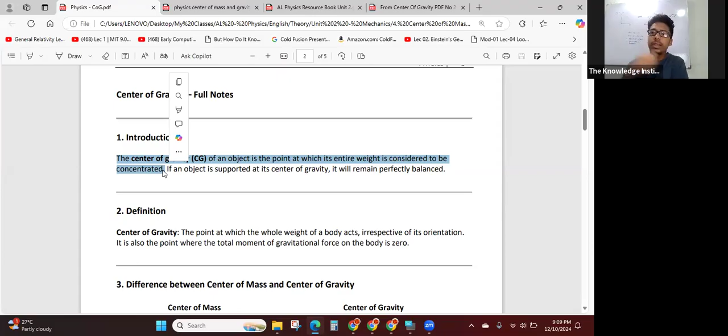Okay. So the conceptual idea of center of mass is, it is the point where we can consider the whole mass is concentrated. So the center of gravity means it is the point where we can consider the whole weight is concentrated. So the center of gravity of an object is the point at which the entire weight, so you have to highlight the term weight, is considered to be concentrated.

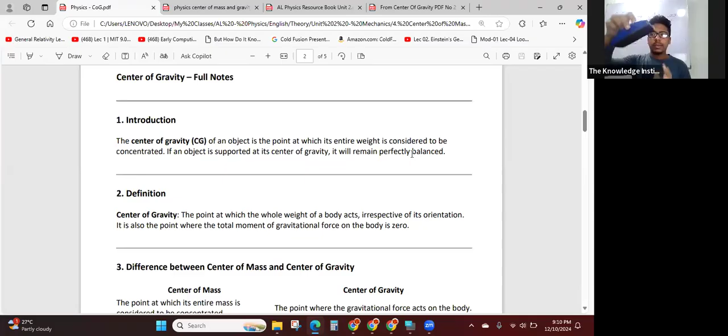If an object is supported at its center of gravity, it will remain perfectly balanced. Now, for example, I'll take this. This one has a center of gravity. If I try to balance from this point, I can't balance, but I can balance it from the middle because the center of gravity will be at the middle. So, if an object is supported at its center of gravity, it will remain perfectly balanced.

So the center of gravity of an object is the point where we can think the whole weight is concentrated. But that is not the actual definition. The definition we can give for the center of gravity is the point at which the weight of the object is acting. The point at which the whole weight of a body acts, irrespective of its orientation. It is also the point where the total moment of gravitational force on the body is zero.

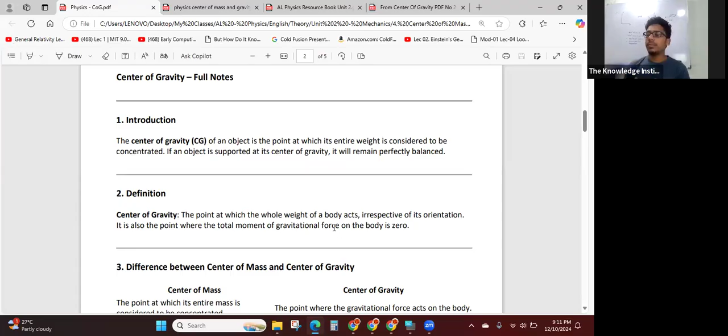Now, if I consider from the center of gravity, the moment in the clockwise direction and the moment in the anti-clockwise direction, they cancel off. So the moment about the center of gravity will be zero. So the definition for center of gravity is the point at which the whole weight of a body acts. I can explain this to you with a picture.

So if you take an object, the material is made of an enormous number of small particles. Each particle experiences a gravitational attraction force, and they all act vertically downward because the gravitational attraction acts towards the center of the Earth. So you can see these are now a bunch of parallel forces. Each weight is a force, so we can find the resultant of these forces.

Now remember, in the moment of force, we studied how to find the line of action of two parallel forces. So likewise, now you can find the line of action of the resultant of all of these forces. It will be acting from a particular point. That will be the center of gravity.

So let's write down. First you have to write the center of gravity of an object is the point at which its entire weight is considered to be concentrated, and the definition is the point at which the whole weight of a body acts, the point at which the weight is acting. Then, after writing the definition, draw a picture like this.

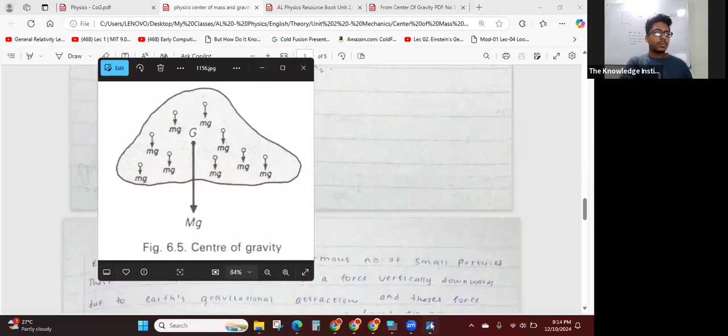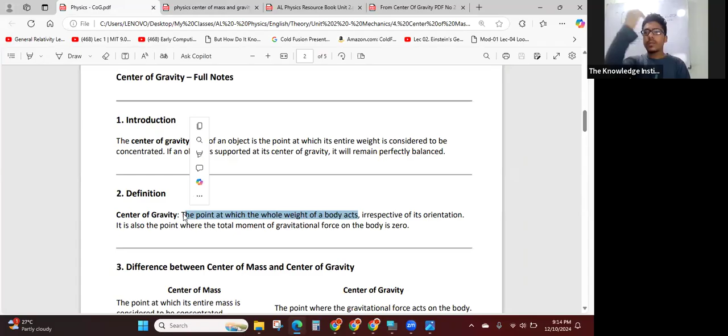The point at which the whole weight of a body acts. Okay, so then we can write: every object is made of an enormous number of small particles. These small particles experience gravitational attraction force vertically downwards. And all of these forces are parallel to each other.

If we calculated the resultant of these forces, it will act from a certain point. This point is known as the center of gravity.

Okay, I'll read again. Or else I better read and write. Okay, so every object is made of an enormous number of small particles. I can't write this. Okay, I'll read again. Quickly note down.

Every object is made of an enormous number of small particles. These particles experience gravitational attraction force vertically downward. And all of these forces are parallel to each other. If we calculate the resultant of these forces, it will act from a certain point. This point is known as the center of gravity.

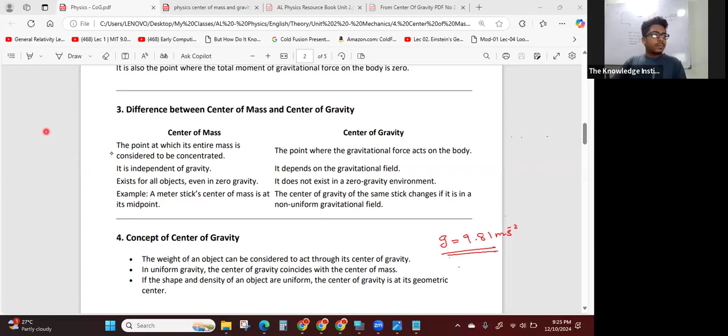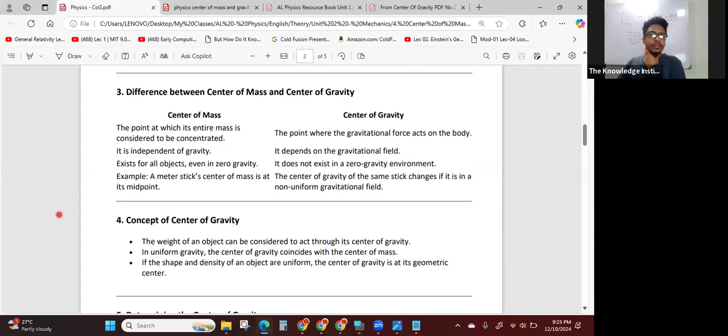So those are the major differences of center of mass and center of gravity. Okay, so the concepts of center of gravity: so far what we discussed is summarized here. The weight of an object can be considered to act through its center of gravity. The weight of the object acts from the center of gravity.

In uniform gravity, the center of gravity coincides with, now you have to highlight this, the center of mass. I think it's better you write uniform gravitational field. Gravity or gravitational field both have the same meaning, but still better to go with the term gravitational field. In uniform gravitational field, the center of gravity coincides with center of mass.

So that line you highlight and write. In uniform gravitational field, the center of gravity coincides with center of mass. Now, if I take an object like this, this object has a center of mass. I'll draw here on the screen. So here I have an object, total mass, let's say capital M. I can consider its center of mass here, meaning the total mass is concentrated at this point. And let's say this is the ground.

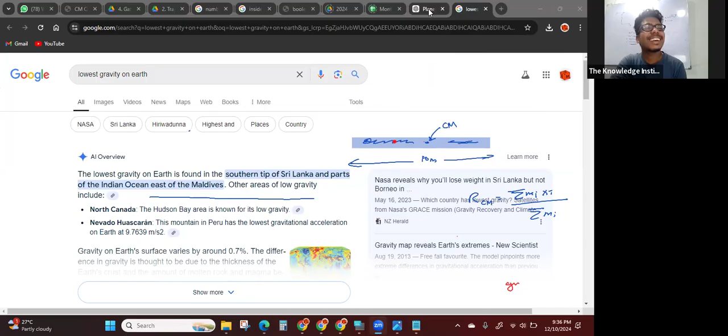So I hope one of my students, maybe you all, can become pioneers in space and start a space exploring company in Sri Lanka, inshallah. Is there anyone who has such goals? Okay. Thank you, Hiroshi and Abhishani, for sharing this information. Wow, that's so great. So if you start a spaceship company like that, what can I say? You should take me to space, okay? Free of charge. All right. I also have a dream of going to space. I'm serious. Anyone can think I'm crazy, but it doesn't matter. I also have a dream to go to space, hopefully one day.

All right. So, determining the center of gravity. Here we have to emphasize these concepts. First, the center of mass coincides with the geometric center of a regular shaped object if the mass distribution is uniform, the density is uniform. Secondly, about the center of gravity: if the gravitational field is uniform, the center of gravity coincides with the center of mass, and if the mass distribution is also uniform, then the center of gravity coincides with the geometric center of the regular shaped object.

So the center of gravity of regular shaped objects, something like a square sheet or circular disc, is at the geometric center. This is true only if, okay, the center of gravity of an object will be at its geometric center if and only if two things are satisfied. The first one is the mass distribution is uniform.

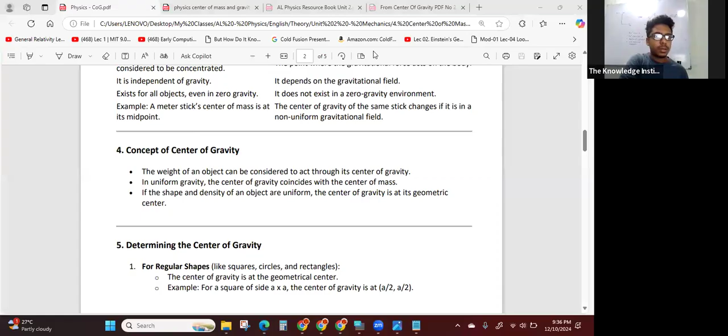Okay, I have got some messages. Okay, you can note down. You can't see any changes on the screen. Okay, yeah. Hold on, I'll check. I'll stop sharing. Share. Your screen sharing is paused. Okay. I hope you can see it now.

Okay, so you can write down the first: uniform rod. So if the length is L, its center of gravity will be at the midpoint. Okay, and uniform ring. So here the center of mass of a ring is also at the center. Now, if you take an object, there is no restriction that the center of mass should be within the object. Now, if you take this ring, its center of mass is not within the object, right? So it is in the space, the middle. Okay.

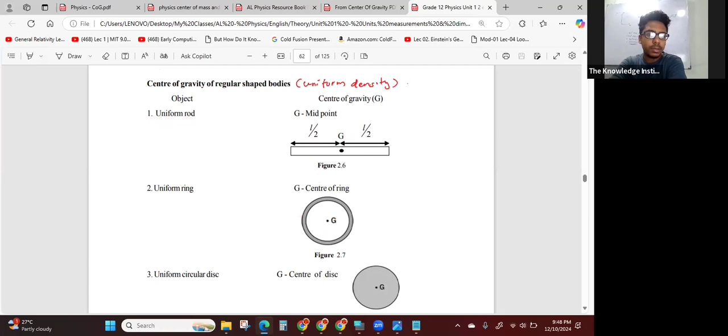You can write down uniform rod and draw this and these things. The center of mass in the ring is here, the same point. If the mass distribution is uniform, then it will coincide with the geometric center. If you take a circular shape, the geometric center is its center. So the center of mass is here. Therefore, the center of gravity also will be here.

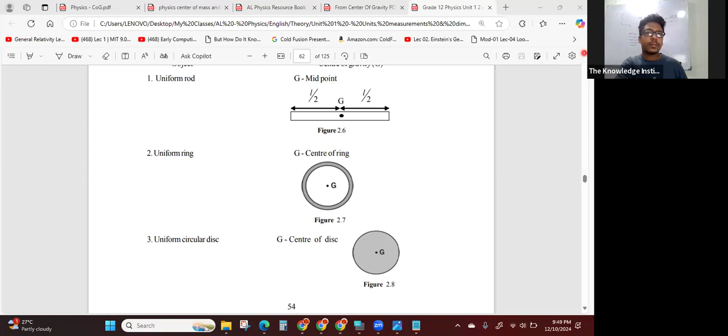And third, you have a uniform circular disc. If you couldn't draw, don't worry. I will share these screenshots also. Okay. Or else you can take a screenshot. Okay. You can take a screenshot and then you can complete your drawings later.

Uniform rectangular shaped lamina. Lamina means thin sheet. For thin sheets, we say lamina. So the center of gravity will be the intersection of the two diagonals.

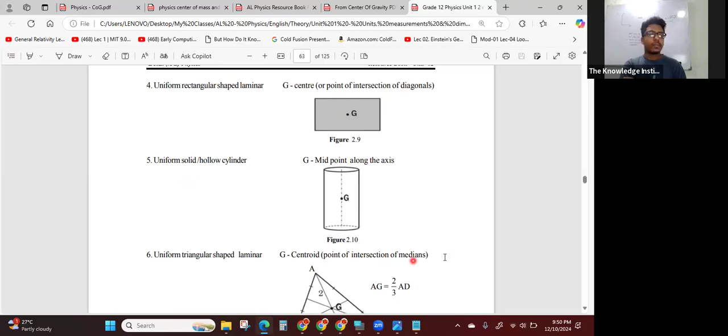And if you take a triangular lamina, how do you get the center of gravity? So say you have a triangular lamina. You have to draw a line from the vertex to the midpoint of the opposite side. And from this vertex to the midpoint of the opposite side. And from this vertex, then if I draw these two correctly, then definitely this will go through the center intersection.

Okay. And here you should know that if this is the center of gravity, the center of mass also will be the same point. Here, this length ratio is 1 to 2. So this length to this length is 1 to 2. That means if this length is 2 centimeters, this will be 4 centimeters. If this is 5 centimeters, this will be 10 centimeters. The ratio is 1 to 2. Okay, so that is here.

It will be the same for any type of triangle, like you can take isosceles or equilateral triangle or right angle triangle. So for any triangle, this is the method you find the center of gravity. Okay. And the center of gravity of uniform hollow cone.

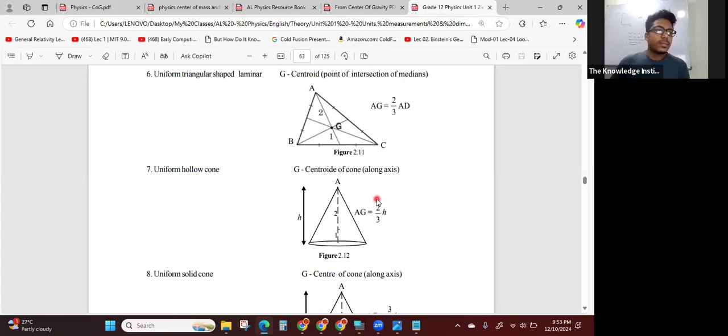Now in physics, we only take the results, but those who are doing combined maths, you have a separate unit called center of gravity, which I like the most in applied. In the applied paper, the first question I'll take is center of gravity because it's very easy. You just have to integrate the density or the mass over the volume. So, uniform hollow cone, uniform solid cone. In combined maths, you have to find all of this using integration.

Guys, give me a second.

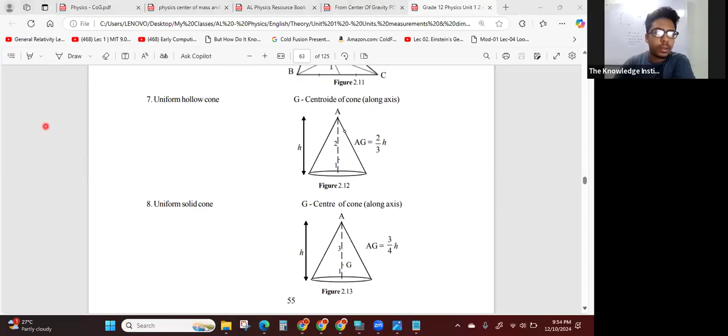Okay, uniform hollow sphere or solid sphere, the center of gravity will be at the center point, midpoint. So that's all. And there are only few things I need to discuss about the theory, and then we can do calculations.

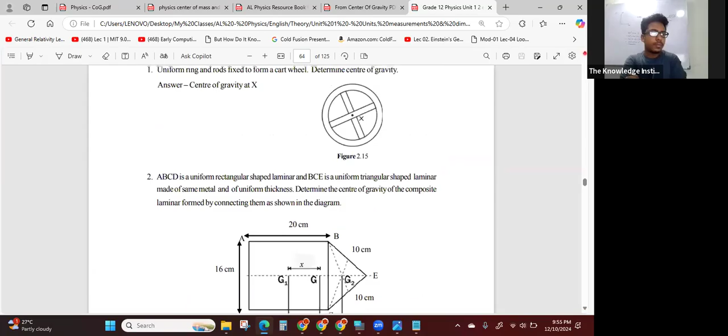Okay, to find the center of gravity of irregular shapes, something like this. For example, if I have an object with no regular shape, for this we can find the center of gravity with the suspension method. That means you hang this from a particular point. If I take an object and hang it from a particular point, then if I drop this, it will oscillate and come to a stable position so that the tension and the gravity, the weight, will be aligned, right?

Finding anything to show. Mm.

Okay, now for example, here I have this, but this is definitely a regular shape. So anyway, let's say if I hang this from here, it remains stable because the center of gravity is also aligned along this line, because you can see the midpoint, if you draw the diagonals, you go from the middle. So from this point the weight is acting, and then the tension, actually it's a friction here on my hand, so that friction and the weight are aligned, so there is no movement.

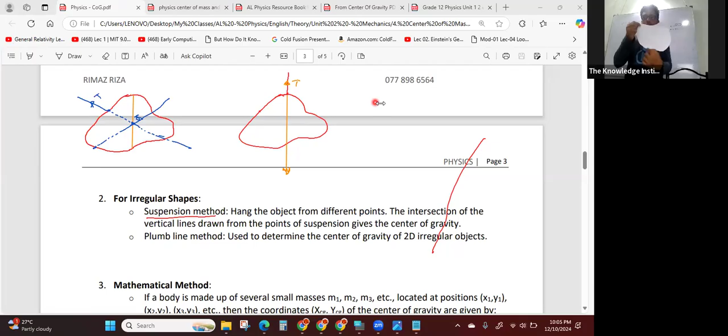Okay. So if I hang it from here, what happens? Here the tension and then here gravity, weight. So if you consider this point, there is a non-zero moment of force. So therefore what happens? It will swing due to the moment of force. Actually here I have friction in my hand. That's why it's stopping.

Otherwise, what happens? It will oscillate and finally come to the equilibrium position. So when it's balanced like this, then you can draw a vertical line. Okay. So I draw a vertical line. So here's a vertical line. And then what I can do is again hang it from another point. So then what happens now? I'm holding from here and release my hand.

So if I hang it from here, now what happens? Here the tension will be there. Tension, and then the weight somewhere from this. It could be here, here, or here, depending on the mass distribution. Somewhere on this line, the weight acts vertically downward, W. Okay. So I know now the center of gravity will be somewhere on this line.

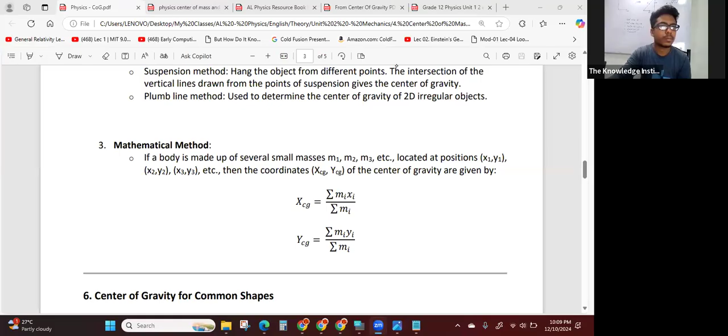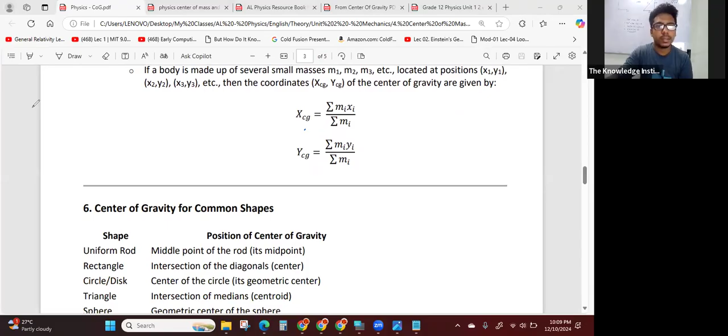So, to find the center of gravity, the plumb line method, it's the same thing actually. Plumb line method means using that string and small weight, the plumb line. We call that the plumb line, no? So it's a string and then a small weight will be there. People in construction use it to see whether it's vertical. It's simply a string and a weight.

Okay. So instead of drawing the lines, you can use the string, and then using the string, you can mark the line correctly. Both are more like the same thing: suspension method and plumb line method. Here also you have to do the same thing, like what I have explained, but now instead of drawing the line, you first use the plumb line. So with the aid of the plumb line, we can draw the line. Okay.

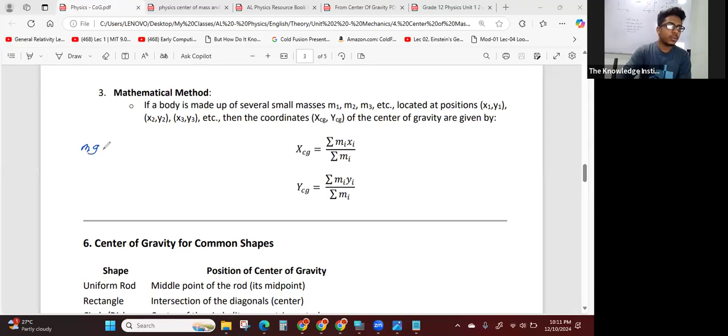All right. So the center of gravity actually comes from the definition of moment of force. Now, how we calculate this is actually the center of mass. So the center of gravity, how do we write? The m1g, the weight, times the distance x1, plus m2g.

Okay, the moment of force is m1g times, let's say, distance x1 plus m2g times x2 plus m3g times x3 plus dot dot dot. Let's say there are n number of particles, mng times xn. Okay, so that one should be divided by, or else I'll explain. This is the total moment.

Now let's say this is the mass of an object. It's made of small masses m1, m2, m3, m4, m5, m6, a number of masses. Then you take the moment from an axis. That axis is your choice. You can choose the axis here, or somewhere far, or here, or on the center of gravity. We don't know it, but assuming we are taking from the center of gravity, you can also do it.

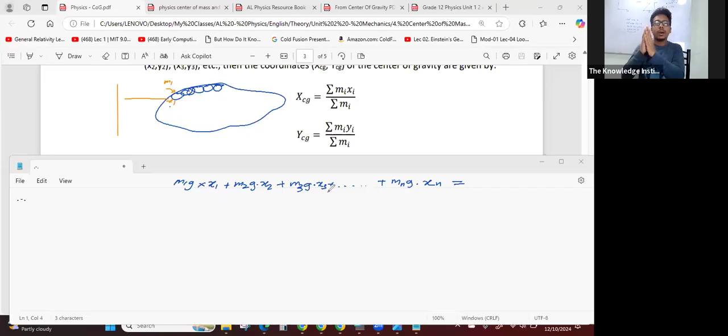Okay, so now let's say I'm taking the axis here. Then this is the mass m1 at distance x1, m2 at distance x2, m3 at distance x3. In moment of force, we studied the net moment about a point due to every force: F1 times d, F2 times d, F3 times d equals the moment made by the resultant of these forces from that same point. The resultant weight of all of this acts from the center of gravity, by the definition of center of gravity, the point where all the weight is acting.

So here capital Mg, where capital M is equal to sigma, or before writing the sigma notation, I write M1 plus M2 plus

Okay, so here M equals M1 plus M2 plus M3 plus dot dot to Mn. So the total weight is from the center of gravity. So here I can write M1 plus M2 plus M3 plus dot plus Mn times g. In the left hand side, g is common in all the terms, so you can take g out. Then M1x1 plus M2x2 plus M3x3 plus dot Mnxn equals the total mass. This equals sigma mi, adding all the masses m1 to mn, i equals 1 to n.

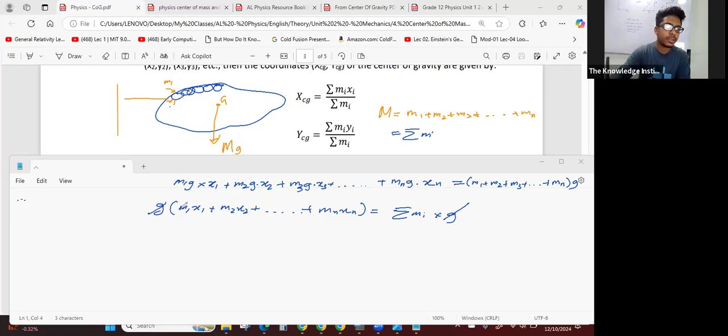Okay, so sigma mi times g. So g on the right hand side and left hand side cancel. So here we get sigma mi into the distance x bar. So weight, the force, into the distance. Let's say this distance is x bar. So therefore, g and g cancel, and we get the equation.

On the left hand side, we have sigma mi xi equals sigma mi times x bar. So therefore, x bar equals sigma mi xi divided by sigma mi. Sigma mi is the total mass. If the total mass of the object is given, you can use that in the denominator. So we write the definition form sigma mi. Okay. Let me know whether you understood this.

So therefore, for the center of gravity we can take x bar, and from x bar you will only find somewhere on this line. If you want to locate it exactly, you have to take the moment from another axis also. From this axis, you take the moment, then you can find the location of y. So by taking the x and y coordinates, you can find the exact location of G. Okay.

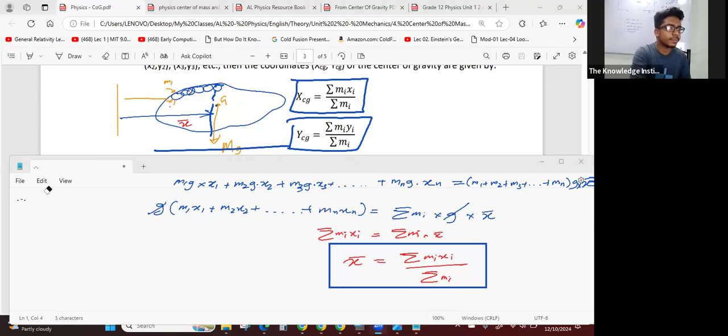But we have only two-dimensional. Okay, one dimension and two dimension, maximum two dimensions. You don't have three dimensions in your syllabus. Okay. If there's anything you didn't understand, please let me know. Okay. So I hope everyone is clear with this. So after that, we can do some questions.

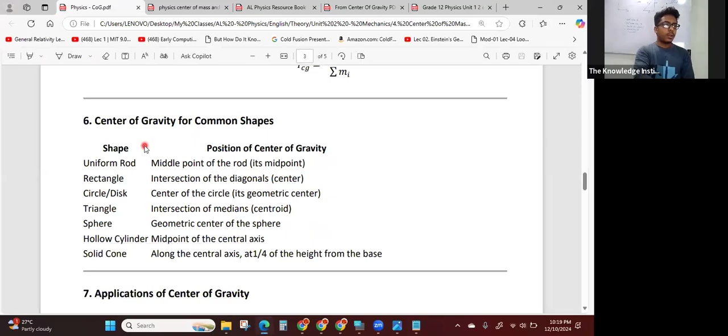Okay, we studied this earlier, those pictures. Applications of center of gravity, engineering and design. Stability of vehicles, bridges and tall buildings depends on their center of gravity. To make it more stable, we try to make the center of gravity as low as possible. Okay.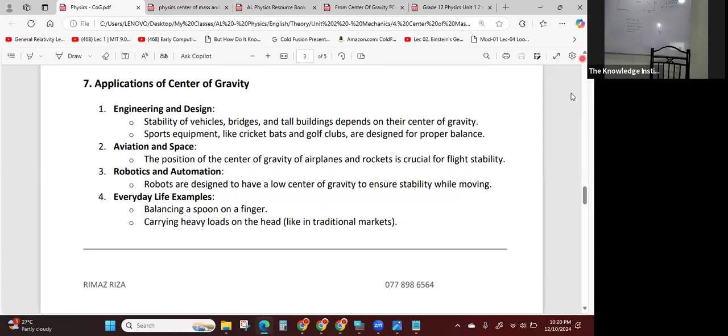There is, during the Second World War, Hitler, excuse me. Okay, so there is a story regarding Hitler during the Second World War. If I'm correct, during the Second World War, they wanted to create a car which can climb a large inclination. So Hitler brought all the engineers in the country, I think around 100 or 500, I'm not sure the count, into this project, and then they were able to create a car which can climb an angle more than 70, something like that.

Okay, so after the success of that project, Hitler killed all the engineers who were involved in that, because he didn't want that knowledge shared with other enemy countries. I'm not sure about this story, but I heard it from one of my combined maths teachers when I was studying.

Okay, so sports equipment like cricket bats. Yeah. The Taj Mahal also, you can see there is a beam kind of thing at the bottom, so it's more dense. I mean, heavy at the bottom, so it's more stable.

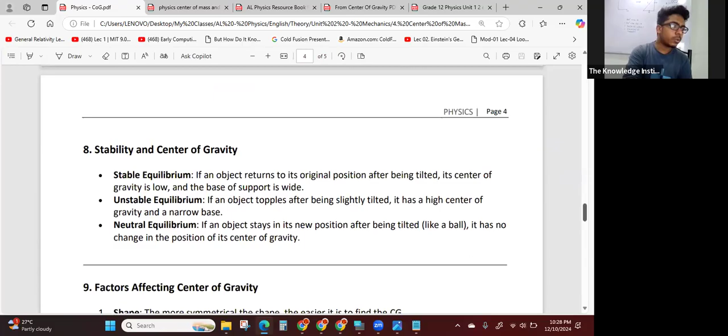There's one video. Yeah, I'll search and share it after the class. It's about the center of gravity of this drilling machine and its stability. All right. So before we move on to stability, we'll do some questions related to center of gravity.

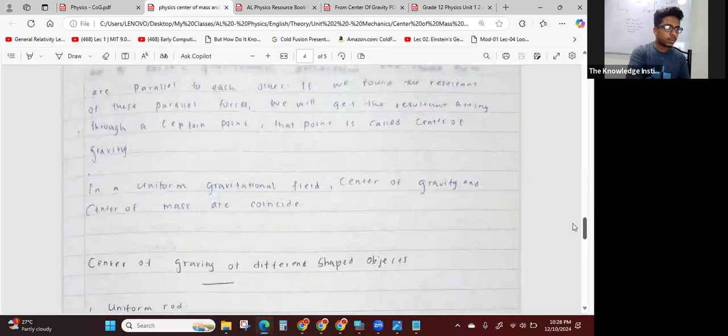So now, for example, if you have a mass distribution like we did in the last class, here a mass, here a mass, here a mass, and here a mass, and you want to find the center of gravity, you can do the calculation similar to what we did in the last class for center of mass. Okay.

Okay, we'll do some questions on center of gravity. I'll give you one question. Quickly find the center of gravity of this mass distribution.

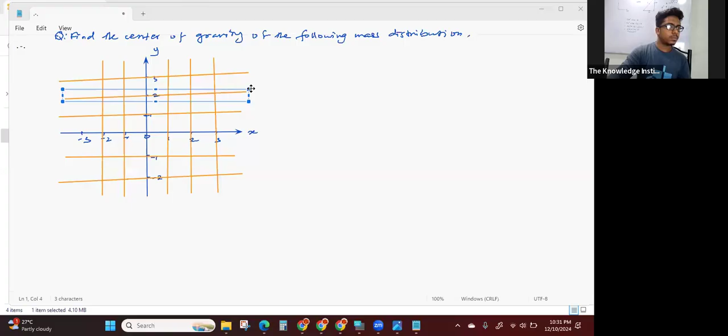I can mark the masses. Let's say the mass is 1 kilogram. I'll just put the numbers, all in units of kilogram. 1 kilogram, and another here, 2 kilogram. Here 2 kilogram. 4 kilogram. Here 3 kilogram. And 1 kilogram. Okay, so find the coordinates of the center of gravity.

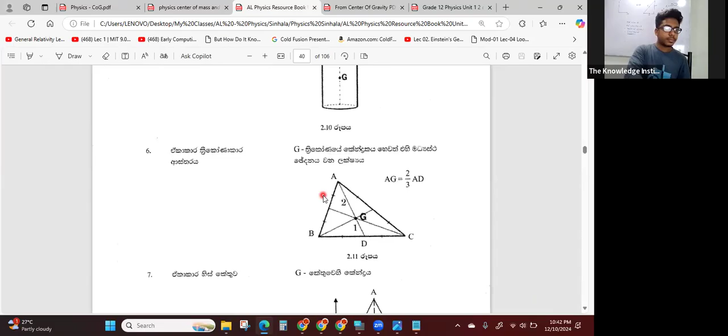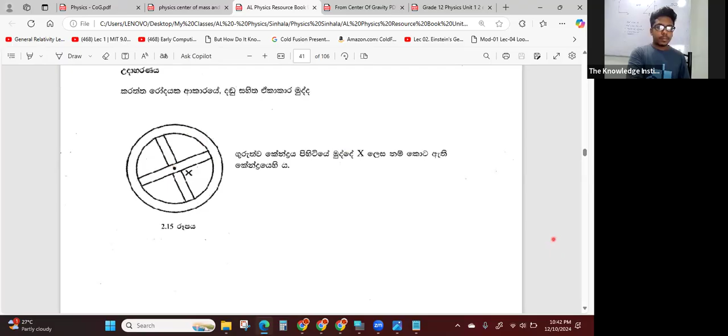guys, give me a second.

Okay, so here we want to find the center of gravity of this combined object. We know if two forces are acting in parallel in one direction, the resultant will be somewhere within that region, right? We studied this in the moment of force, finding the line of action of the resultant. So if the two forces are acting in the same direction, the resultant will be somewhere within that region, right?

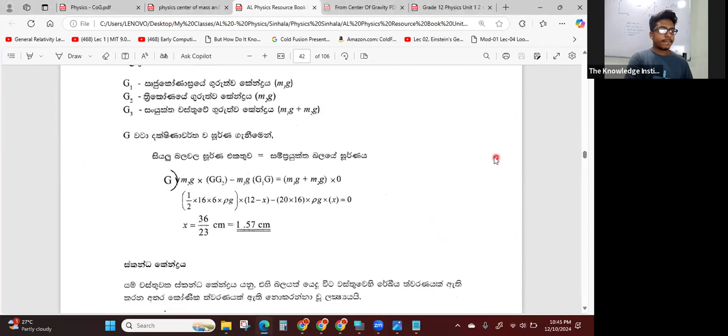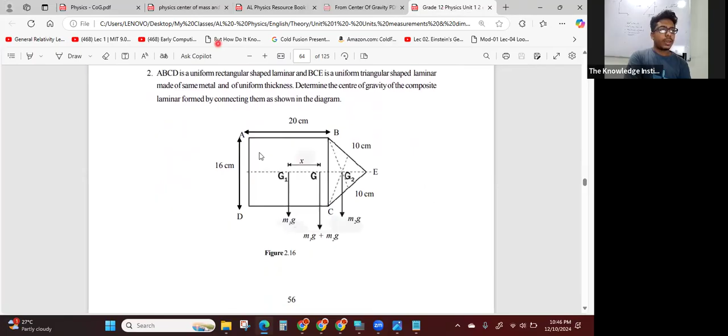Okay, so here we have two laminas. Let's try to find the x value. So here the question is you need to find the value of x. That means the location of the center of gravity of the combined object. So then what you can do is you can take the moment from this point. So if I'm doing this question, I will take the moment from G. So here I'll take the moment from the point G, clockwise moment.

So if I consider the clockwise moment, this M2G weight is making a clockwise moment, and this length we want to write. What will this length be? How do I find this length? So this triangle is 10 centimeter, 10 centimeter. So therefore this length will be... length is here 10 and this is 10. So they have given, we should find this length here. 10 centimeter, 10 centimeter. Okay, so this length is 16 centimeter.

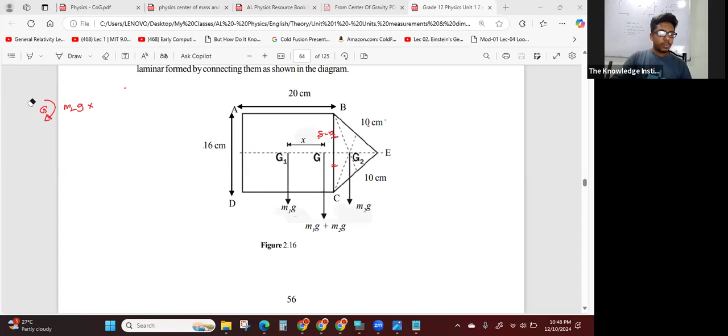So here I'm going to take the moment from point G in clockwise direction. So this M2G into the perpendicular distance. This distance I want to find. So that one I can find using this. This is 16, and this bisects, so this is 8 centimeter. So 10 and 8 means this length will be: 8 squared plus 6 squared is 10 squared, so 6. So this length is 6. From here to here it will be 6 centimeter.

So we know the center of gravity divides in a 1 to 2 ratio. If you take the triangle lamina, it divides 1 to 2 ratio. Therefore, let's say this point is M. So I want to find MG2. MG2 is 1 out of 3 of 6 centimeter, because total 1 plus 2 is 3. Out of that 1 is here, into the total length 6. 1 out of 3 of 6 centimeter is MG2. So therefore this length is 2 centimeter.

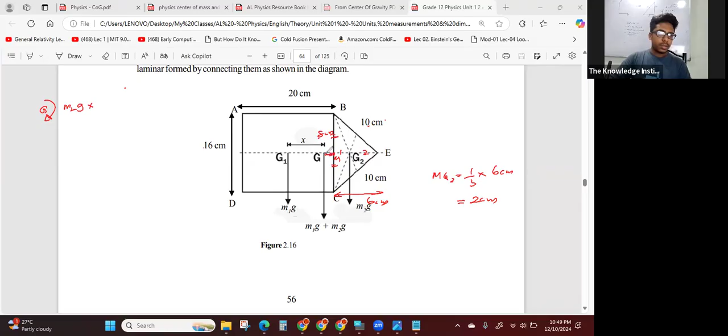Therefore then I want to take this small length. I'll zoom this entire thing. So here this length is 2 centimeter. Because this is 8 centimeter, this length will be 6 centimeter by the Pythagoras theorem. So here the ratio is 1 to 2, so therefore this will be 2 centimeter.

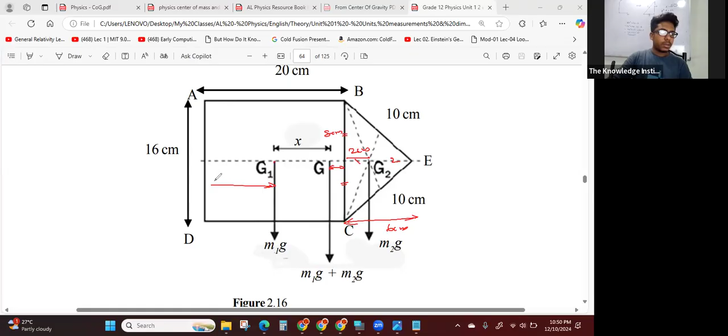And this length we want to write in terms of x. This is 20 means this will be 10 centimeter, because it will be the midpoint. So this is 10, this is also 10 centimeter. So therefore this will be 10 minus x. So I again take the moment from G, then we have M2G times this length, 10 minus x plus 2.

That makes a clockwise moment, and this mass is making anti-clockwise: M1G times the distance x. This is equal to the moment made by the resultant, the total weight (m1 plus m2)g of the combined object. And I'm taking it from the center of gravity point, so the perpendicular distance will be 0.

So therefore here I get m2g times (12 minus x) equals the minus term; if you take it to the other side, you get m1gx. So now if you know the values of m1 and m2, you can put them in and find the value of x. Okay, is that clear? They have given the mass values.

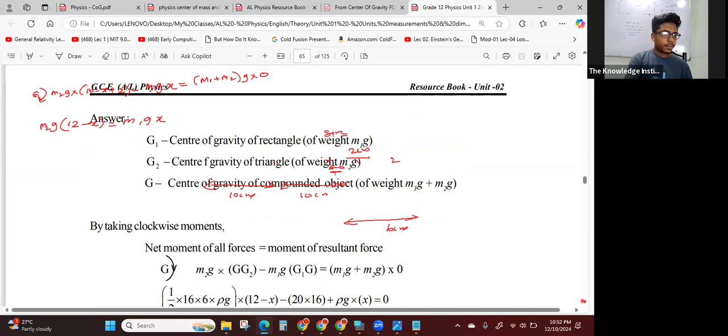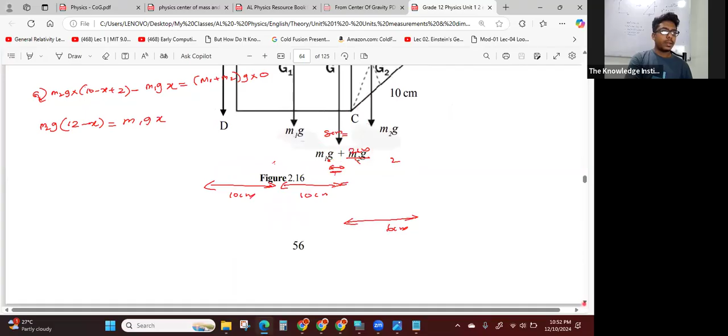Okay, so here we have considered both laminas made of the same material, so the same density. So then you can find the mass M2 as surface density, let's say sigma, times area. The mass per unit area times the area, here 20 into 16. And then M1 you can find for the triangle. So M1 is sigma times half into base 16 into height 6.

So then we can plug those values here. So we have sigma into 20 into 16 into (12 minus x) equals sigma into half into 16 into 6 into x. g and g cancels, so I'm not writing g here. Here 16 and 16 cancel, sigma and sigma cancel. So 20 into (12 minus x) equals 3x.

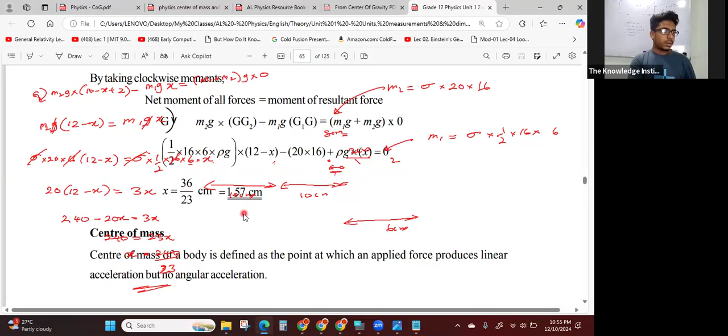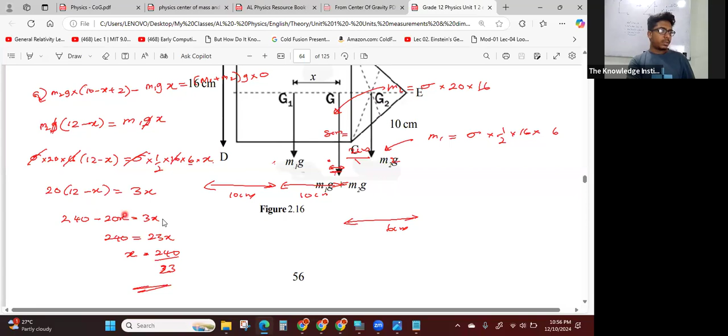36 over 23. Yeah, I got 240 over 23. What's wrong with this? 20 into 16 times 12 minus x equals half into base 16 into height 6. And here 3x. Here minus 20x. I get a different answer.

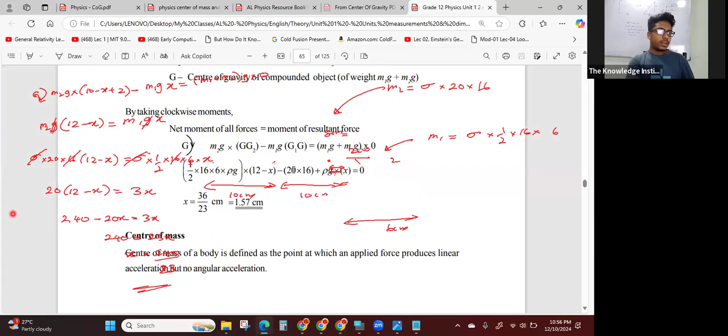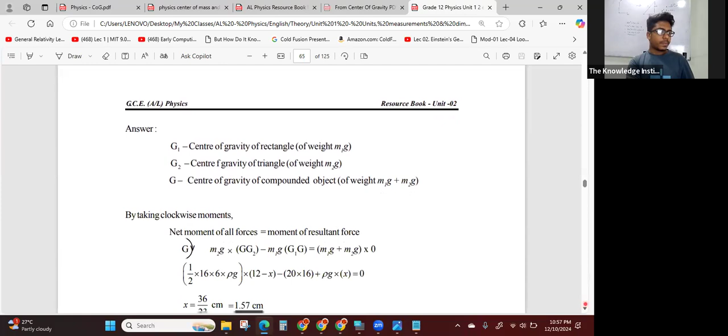Okay, let's check what they have done. So they also have taken the moment from the center of gravity. So here the perpendicular distance is 0. m2g times G2. So the distance is 12 minus x. Yeah, same thing I got. G1G. And then 20 into 16. Wait, hold on.

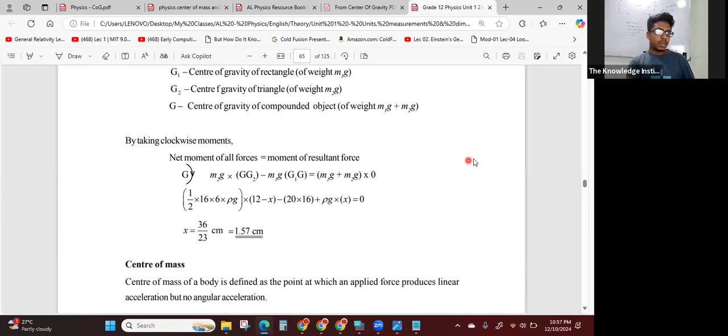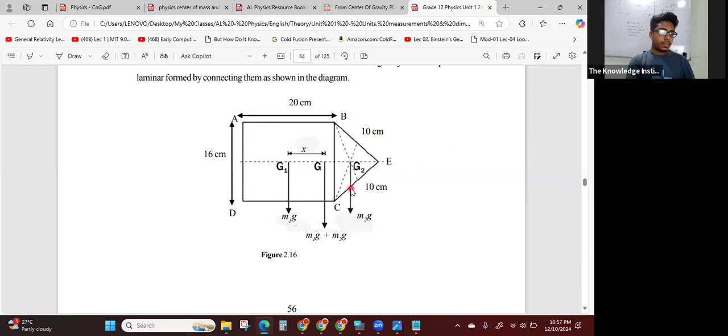We are taking the moment from G in the clockwise direction. So we have m2g into the perpendicular distance, this one. This length is 10 minus x. And then this length is 6 centimeters, so 1 out of 3 into 6 means 2. So if you add that 2 here, the distance will be 12 minus x. That's okay.

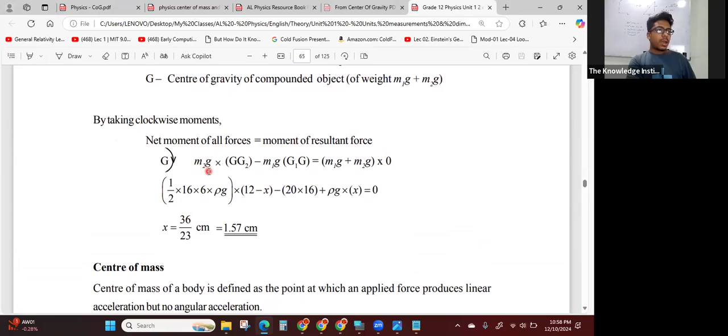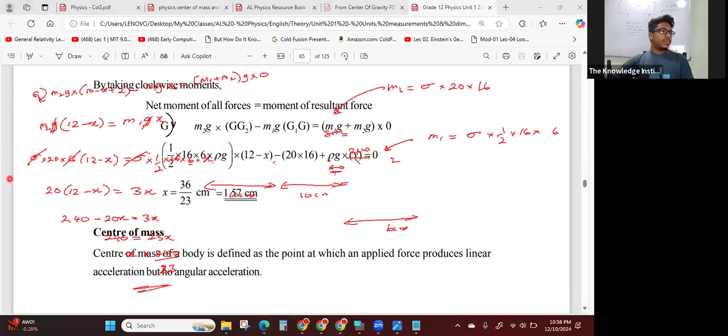I have taken the masses on different sides. So I have found what my mistake was. Here I have marked the masses differently. Here I had to take the mass of the triangle, but I have taken the mass of the rectangle, and here it should be the mass of the rectangle, but I have taken the mass of the triangle. So that's what's wrong.

So then I can write m2, the mass of the triangle lamina, which is half into base 16 into height 6 into the distance 12 minus x, is equal to m1, the mass of the rectangle, which is 20 into 16. This is the area, and the rho cancels, right? Times x. So 16 and 16 cancel. 6 divided by 2, 3. So 3 into 12 minus x equals 20x. Therefore, 36 equals 23x; the minus 3x comes to this side as plus 3x. Therefore, x equals 36 over 23. Same answer.

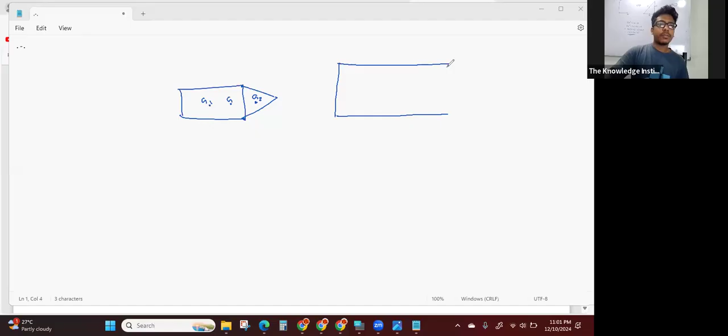So in this question, we add two different masses. We take one rectangle and then we add a triangle. This one's center of gravity is G1 and this one's G2, and then you can consider the moment of forces to find the center of gravity G. There are also other types of questions where, let's say you have a rectangle lamina and from that you cut the triangular part, and you have to find the center of gravity of such an object.

Here the triangle lamina is added. If the triangle lamina is cut and taken out, initially with only the rectangle G1 will be here, and the triangular part G2 will be here. If you cut and remove this part, the line of action of the resultant will go to this side, in the direction of the larger mass, a little bit outside of these two. So such kinds of questions are also there. We'll do one example; I will find it and send it in the group.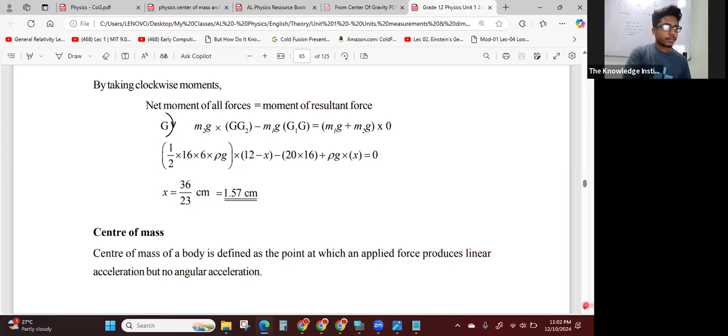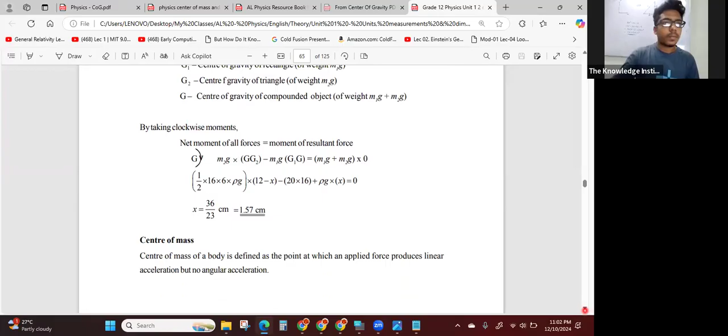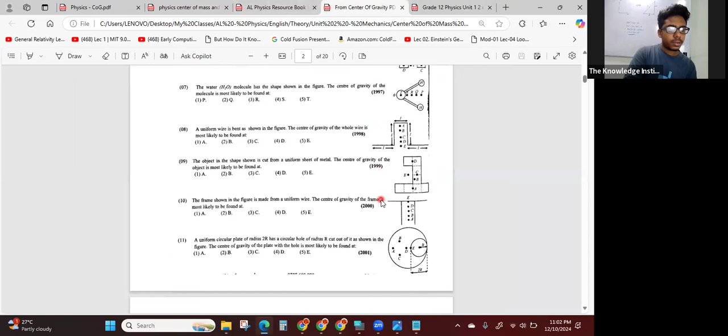Okay, did you understand how to find the center of gravity? I think I have some questions on center of gravity. I'll share this sheet, these past paper questions on center of gravity from every year. I'll share this also.

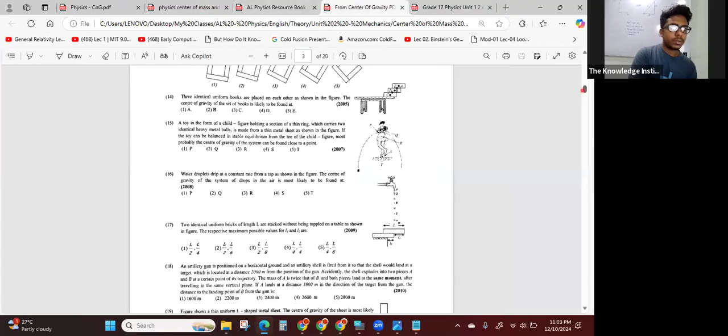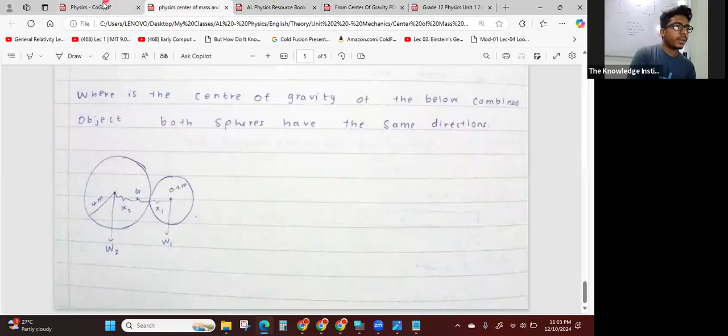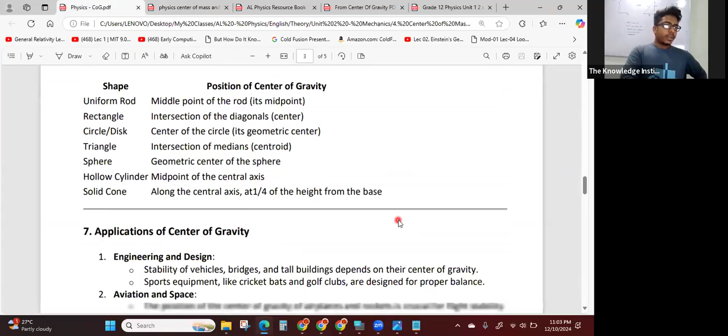The only theory remaining to discuss about center of gravity is stability, and we also want to discuss some more questions. That part I will discuss in our next class, just 10 to 15 minutes. The stability: what is stable equilibrium, unstable equilibrium, neutral equilibrium. So with that, we'll conclude today's class.